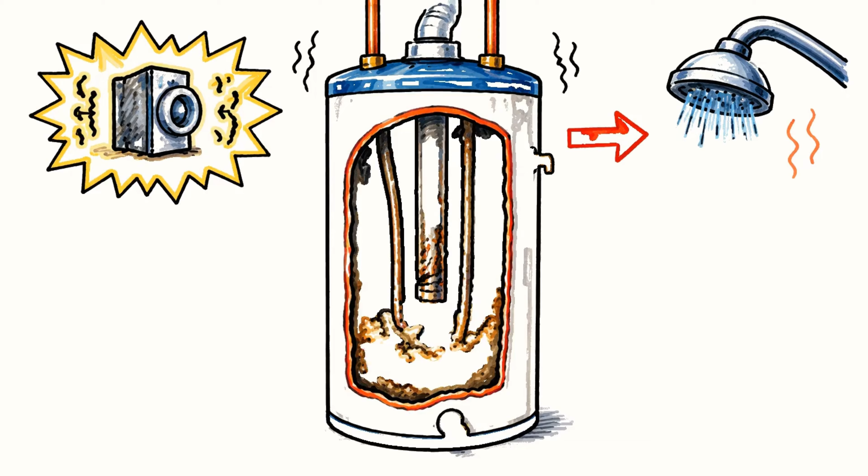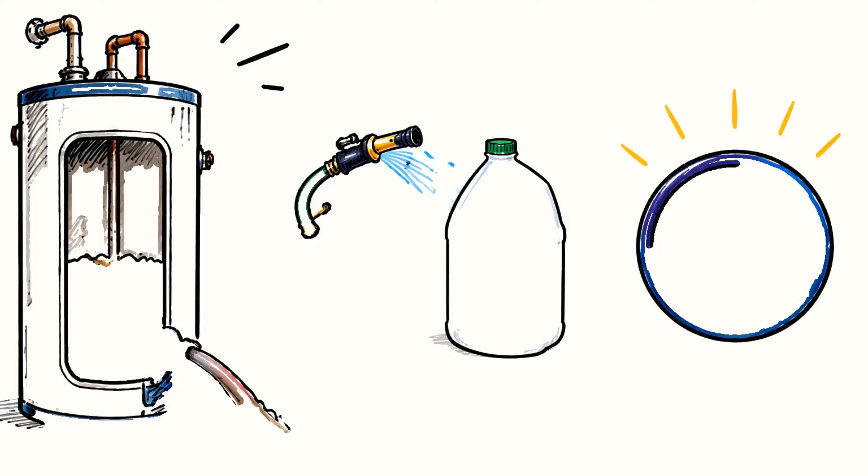If your water heater is rumbling, running out of hot water faster than it used to, or pushing cloudy water to the tap, the inside of that tank is almost certainly caked with buildup. The reassuring part is that you can clean it out yourself with a garden hose, sometimes a couple gallons of white vinegar, and about an hour of your afternoon. No plumber, and in most cases, no new heater.

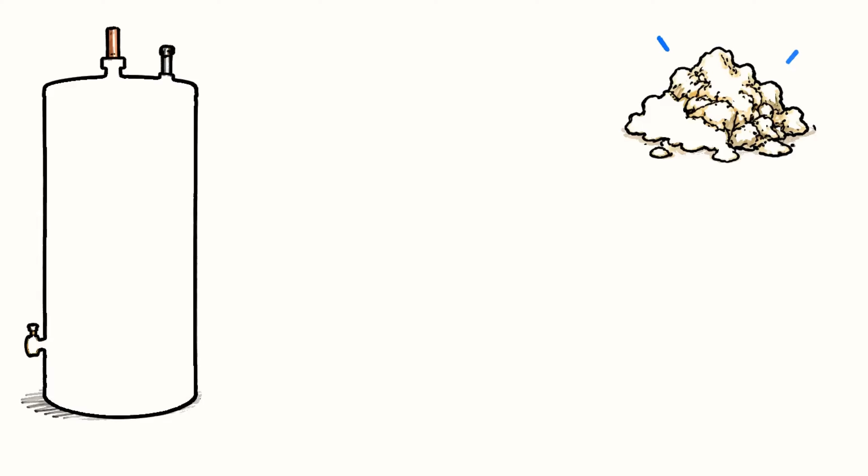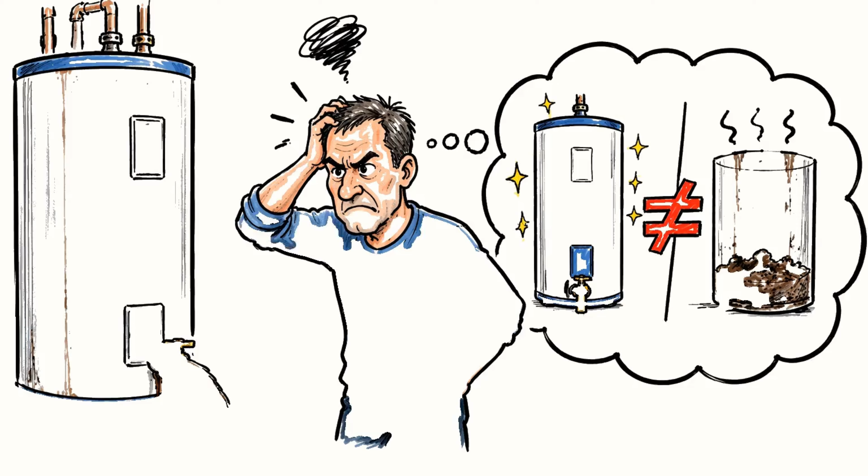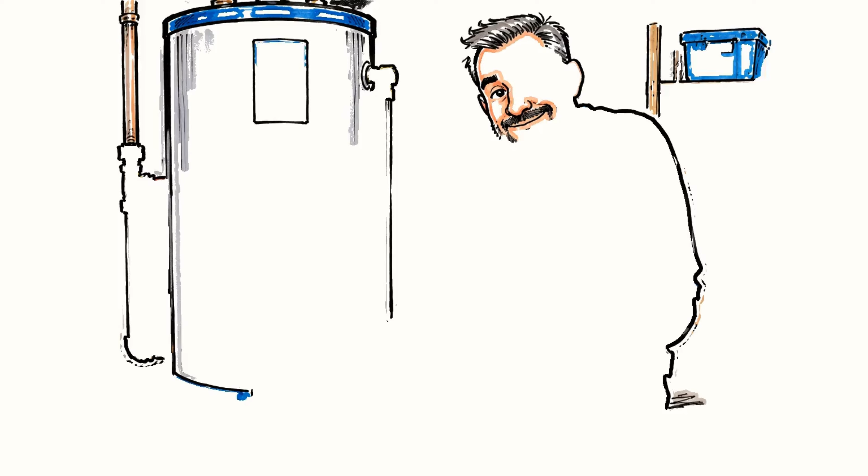The catch is that what everyone lumps together as sediment is actually 3 different things, and each one comes out a different way. Flush the wrong one and you will swear that cleaning your tank does nothing at all. So before you touch that drain valve, let me show you which of the 3 you are actually fighting. I have flushed a lot of these tanks and read through plenty of plumber forums full of people battling the exact gunk you are looking at, so this is the version that actually works in a real basement.

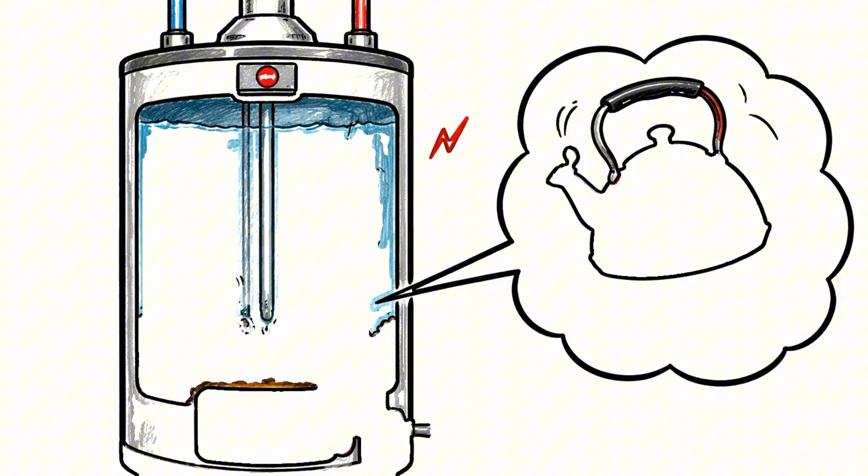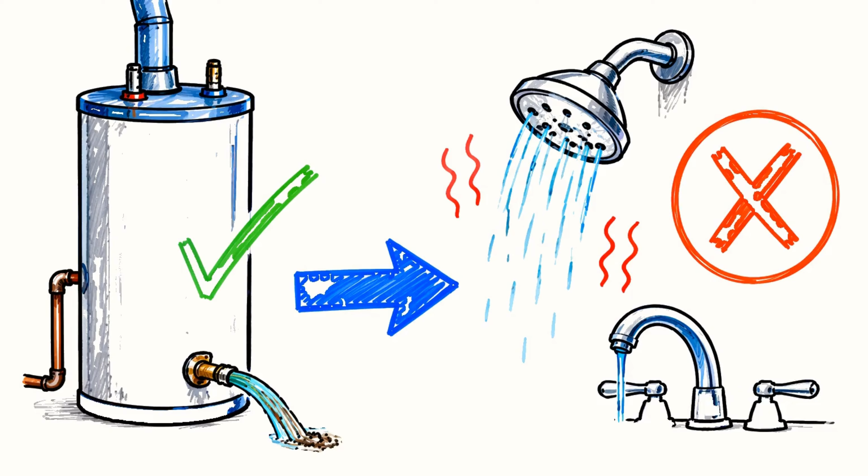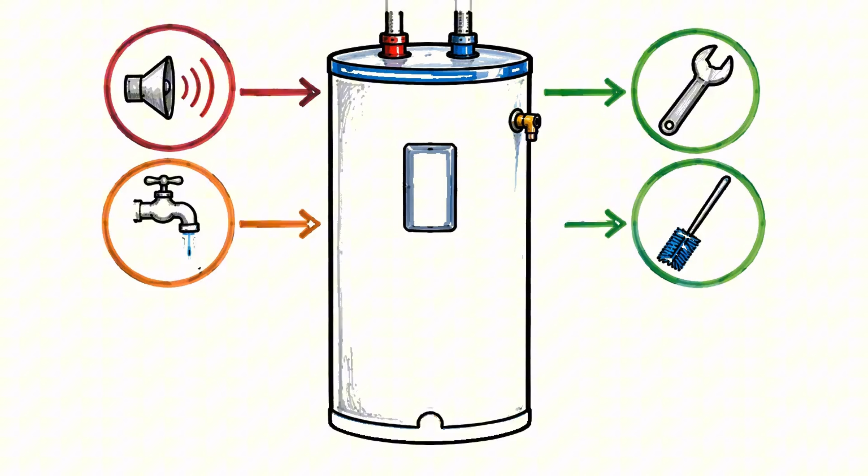Here is the fast way to tell the 3 apart. If the tank pops, rumbles, or sounds like a kettle full of marbles when the burner fires, that is loose sediment. If the noise and the weak hot water hang around even after you flush, you are dealing with hardened scale. And if the hot water smells like rotten eggs or runs out rusty and dark, that is sludge. 1 tank, but 3 separate problems, and each has its own fix. Let me take them one at a time.

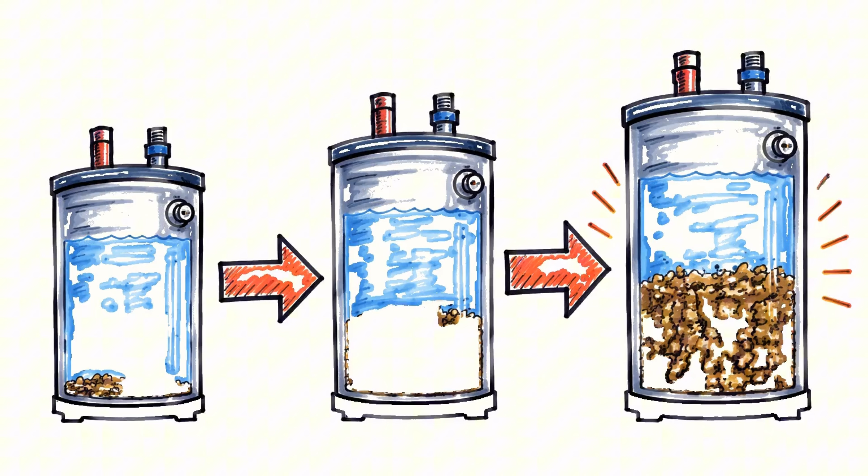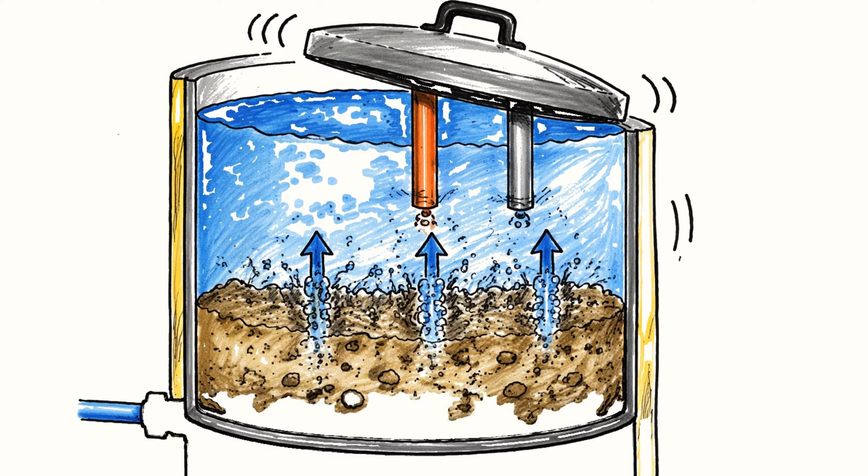Start with sediment because it is the most common and the easiest to beat. Sediment is loose mineral grit, mostly calcium and magnesium, that drops out of your water every time the heater warms it up. The harder your water, the faster it piles up on the bottom of the steel tank. That is what makes the popping and rumbling. Water gets trapped underneath the grit, boils, and forces its way up through the layer like a pot lid rattling on the stove. You may also notice your gas or electric bill creeping up, because that grit blanket makes the heater work harder for the same hot water.

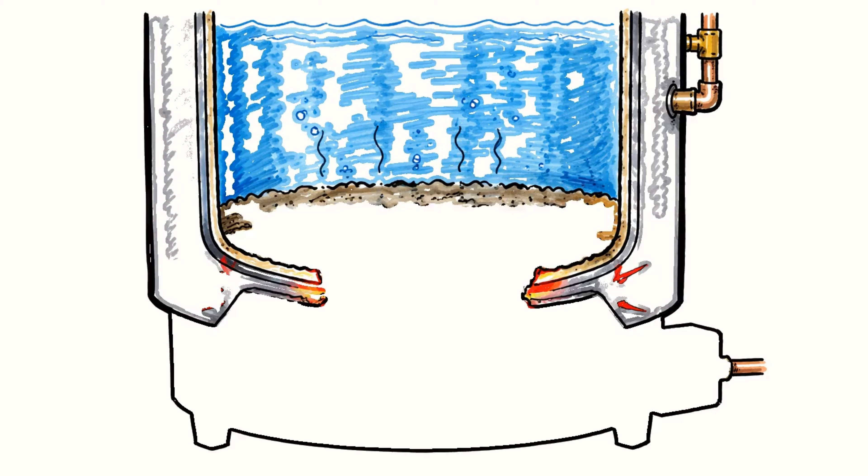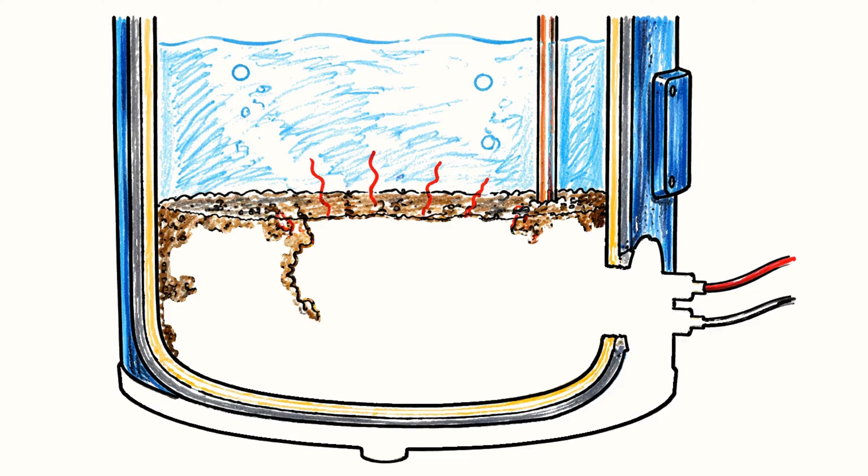Left alone, it does real damage. On a gas heater, the sediment blankets the bottom so the burner cooks the steel instead of the water. The glass lining cracks, and the tank eventually rusts through and leaks. On an electric heater, the grit buries the lower heating element until it overheats and burns out. You clear loose sediment with a flush, and it is a 1-hour job.

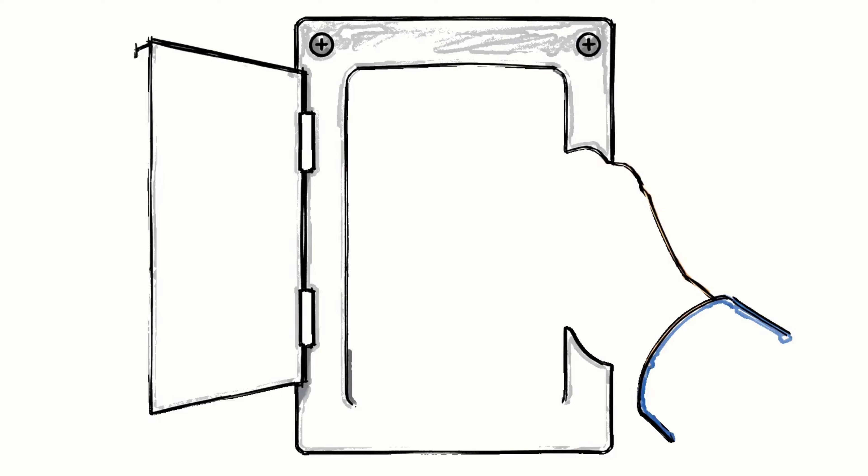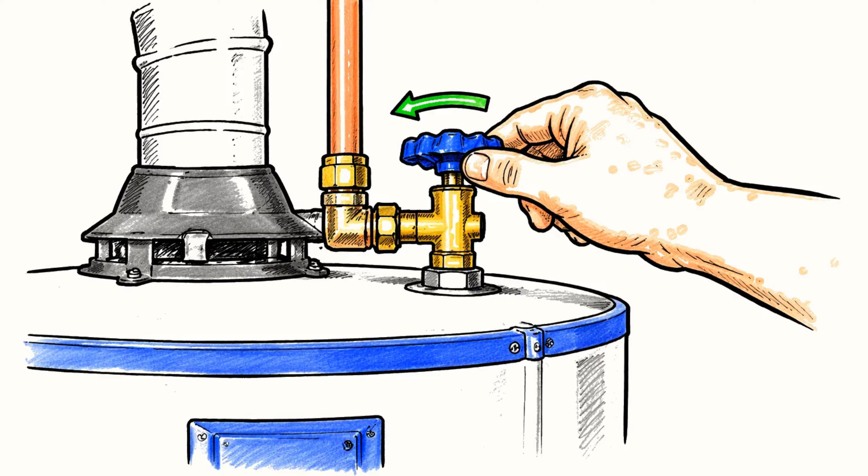First, kill the heat. On an electric unit, flip the breaker off. On a gas unit, turn the gas control knob down to pilot or off. Next, close the cold water supply valve on top of the tank. If the heater has been running hard, give it an hour to cool, because the water coming out can be hot enough to scald you, and keep kids and pets away from the runoff. Hook a garden hose to the drain valve at the bottom and run the other end to a floor drain, a driveway, or out the door downhill.

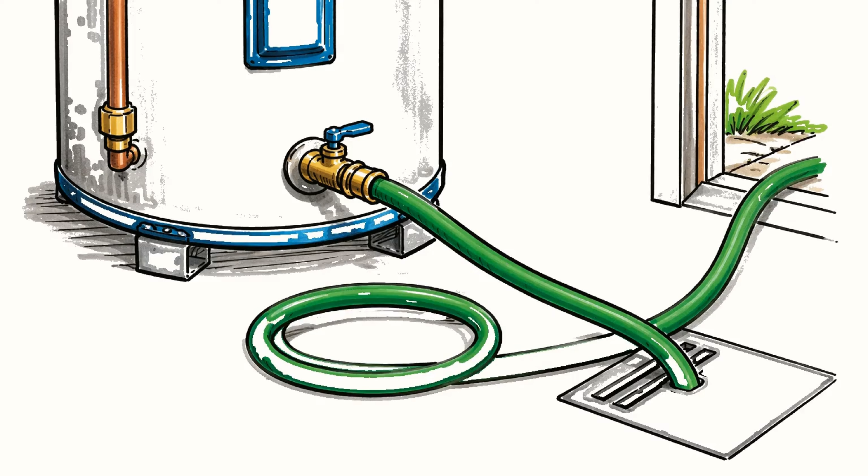Now open a hot water faucet somewhere in the house, which breaks the vacuum so the tank can actually empty. Open the drain valve and let it pour out. What comes out tells you a lot. Loose sediment runs out as sandy white or brown grit, while dark soft muck means you are into sludge territory. Once the tank is down, leave the drain open and turn the cold supply back on in short bursts. That incoming water stirs up the settled grit and blasts it out the hose. Keep going until the water running out is clear instead of cloudy and brown.

Then close the drain, pull the hose, shut your faucet, reopen the cold supply, and let the tank fill all the way back up before you restore the power. On an electric heater, that last part matters because firing a dry element will smoke it in seconds.

On to the stubborn one. Scale is the same minerals as sediment, but instead of sitting loose, it is baked into a hard white crust fused to the bottom of the tank and caked onto the electric elements. Think of the chalky ring inside an old coffee maker, except welded in place. This is why some people flush their heater, see the water run clear, and still have a noisy tank that runs cold. The hose slid right past the crust.

Scale will not budge with water alone. You need acid, and plain white vinegar does the job for a few dollars. Here is the deep clean. Run through the same shutdown and drain steps you just learned, and empty the tank completely.

Then you need to open the tank up. On an electric heater, take out one of the heating elements with an element wrench, which is a $10 tool. On a gas heater, unscrew the anode rod from the top to get an opening. Pour in 1 to 3 gallons of undiluted white vinegar through that opening, enough to cover the deposits, and add a little water if you need to.

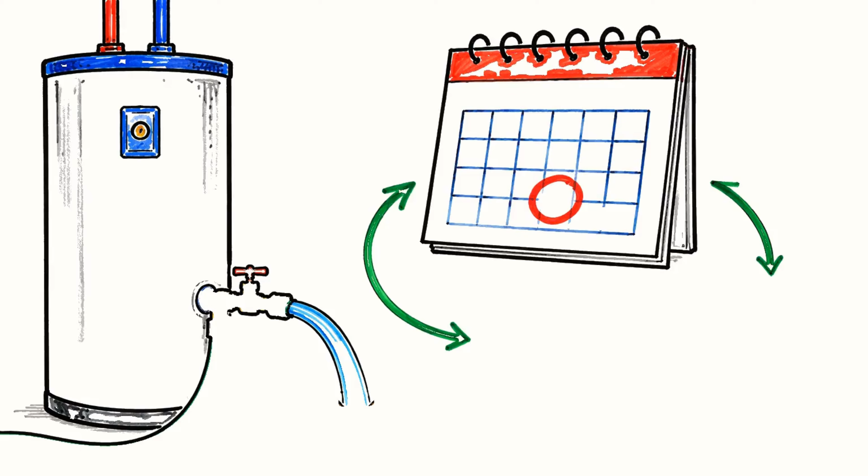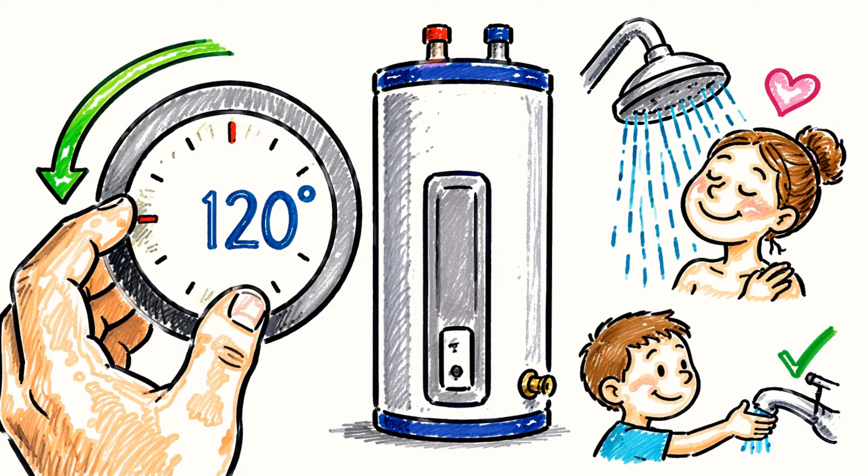To keep the buildup from coming back, flush the tank once a year, every 6 months if your water is hard. Drop the thermostat toward 120 degrees since cooler water sheds fewer minerals and scalds nobody. Check the anode rod every couple of years, and if your whole house fights hard water, a water softener attacks the root cause for every appliance you own, not just the heater.

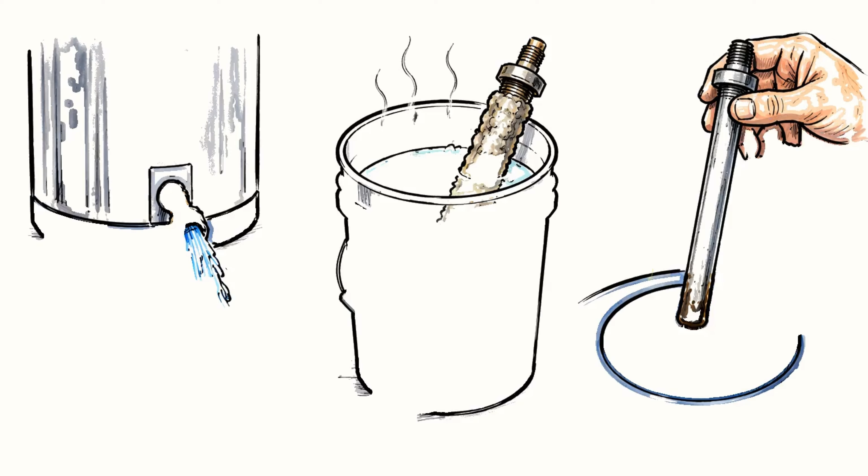So that is the real picture. The loose grit flushes out with a hose, the hard crust dissolves in a vinegar soak, and the smelly sludge clears once you handle the anode rod. Match the fix to the symptom, and a tank you thought was failing usually has years left in it.